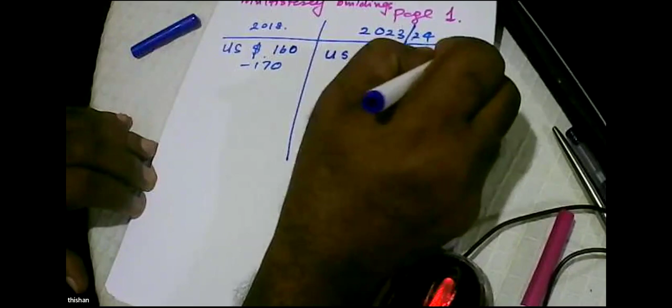In 2018, what was the price of the US dollar? It used to be something like 165, 160 to 170 rupees, just a rough range. Now, taking 23, 24 values, the US dollar has gone up to 310 to 320. But still you can see it's nearly double in rupee terms.

Then we can also look at the price of diesel. It used to be around 120, 130 rupees per liter. Now it is 300 to 350 rupees per liter, and it varies all the time.

And then let's look at electricity. We used to have a unit cost maybe about 10 to 15 rupees. Today it's about 50 to 90 rupees per unit. So you can see very significant variations in costs.

And with that, what could happen? Let's see. So if you look at the basic ingredients that we use: cement, sand, aggregates, concrete, and many other materials, and steel.

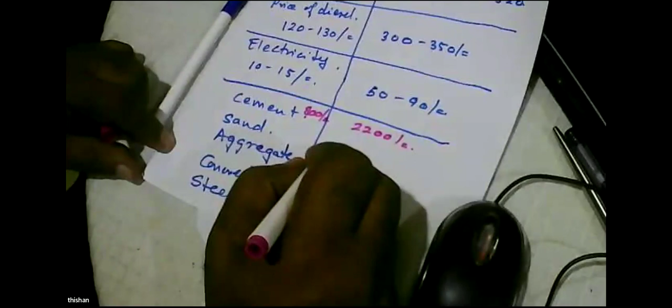Cement used to be around 800 rupees. Now today it's around 2,200. If you look at sand, good quality river sand today costs about 22,000 rupees per cube. Manufactured sand can be slightly lower, it used to be around 10,000. Aggregate cost would have been about 8,000, today it goes around 12,000.

For 1 meter cube of concrete, today, with placing, labor, everything, it can cost between 40,000 to 50,000.

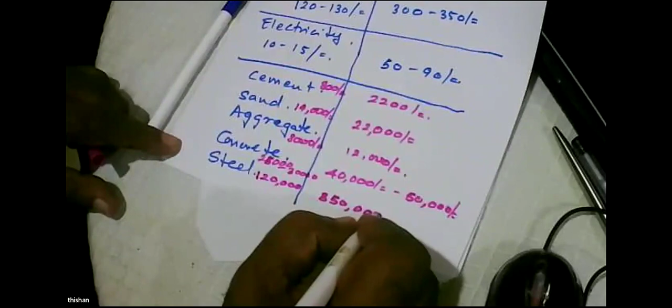Now let's look at steel. Per ton price used to be about 120,000. Today, with VAT prices, it's something close to 350,000. But that is what we buy. If you consider with the fixing charges, this used to be around 200,000. So today it is close to 450,000, 500,000 after allowing for wastage.

Now, if you look at all these figures, for steel we can see clearly about 250% increase, and cement, these prices would have been 150% increase. So you can clearly see where our future should be. Our future should be structures that need less steel.

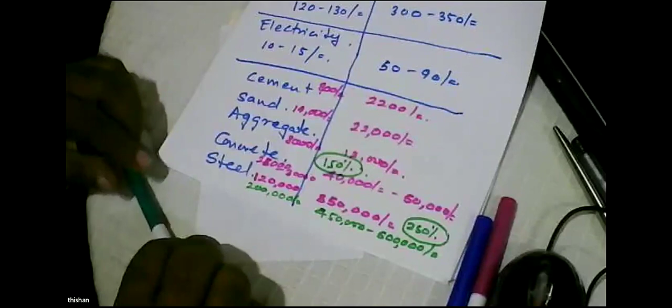So now we have to see whether Eurocode allows, on what basis that we go for this particular concept. So for that, what I thought was, let's look at a past event.

where the whole world had similar problems, and that is 1945, end of Second World War. Russia was devastated. Germany almost completely destroyed. Europe needed a lot of renovations and rehabilitations. And England needed a lot of new buildings. But huge amounts of resources had been used for the Second World War, so there were shortages.

Steel, cement, and many other ingredients were in shortage.

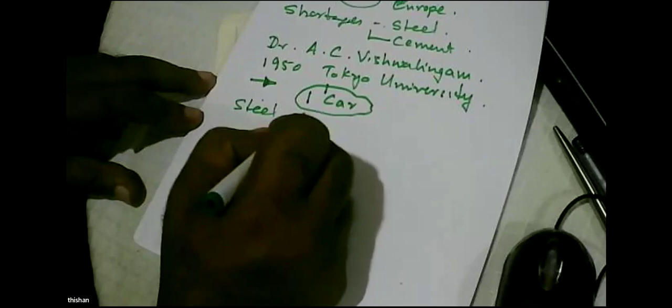Similarly, many other countries faced severe steel shortage. And those days, materials were very expensive, labor was very cheap. People were looking for jobs and they were willing to work for low wages and have simple lives.

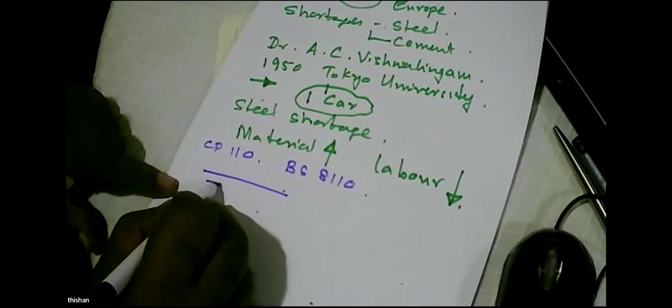So those days, if you look at CP 110, then BS 8110, both codes support something called rib slabs. So the idea is we cast a slab to a thickness of 75 millimeters, and these ribs can be about 2 meters, 2.5 meters apart. The whole idea is this rib will be strong enough to span one way and ensure the deflection delta is pretty low. That's the idea.

Now, if you look at this idea, how does it come? It comes from the behavior of a slab. Let's take an example.

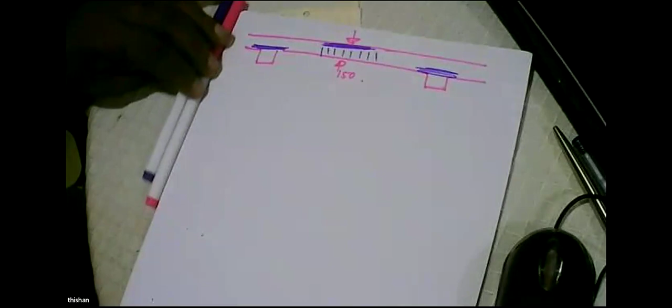Because we know steel has a ferrous oxide layer around it, and there can be various forms, Fe2O3. There are so many different varieties, but let's just say it's an oxide layer. Cement has tricalcium silicate plus water, giving calcium silicate gel plus calcium hydroxide. This creates a lot of calcium hydroxide. So if you look at concrete, its pH value is around 12 to 13.

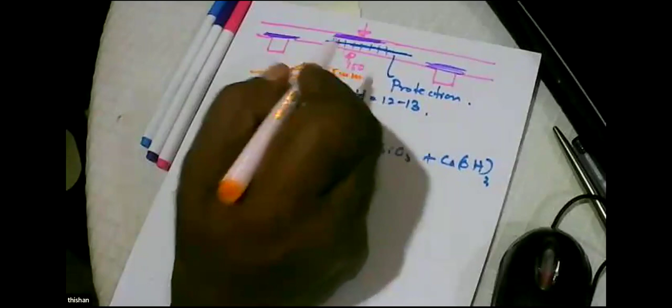And this ferrous oxide layer is very stable when pH is high. So we have a stable environment, and provided that we introduce a cover of 25 millimeters or more, then we can have a structure that is going to definitely last 50 to 100 years, provided that we have cured concrete at least 1 week. Because curing of concrete will continue this reaction, and continued reaction means a lot of calcium hydroxide in concrete, and pH will be high, dense concrete. So curing is very important.

So if we cure concrete, the whole purpose of crack control in cracked concrete is to protect steel. When we say cracked, we are talking about a surface crack width of 0.3 millimeters, but it rapidly diminishes in width, and by the time it reaches the reinforcement, it's negligible. So that's the kind of crack that is allowed, and generally we can't see any of these cracks because they are so fine.

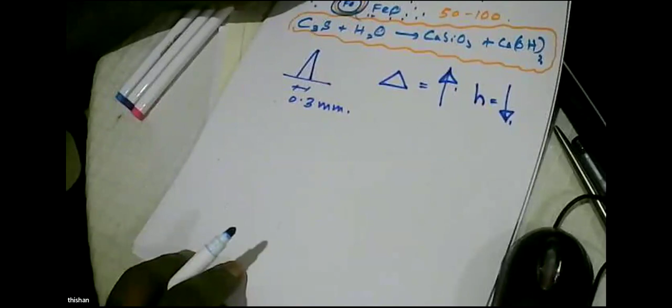So then people thought, why are we having all this concrete? Can't we remove all this concrete? But they found deflection is a big problem. Deflection is high when the thickness is low, so they could not do it. Then they thought, can't we have ribs, beams, and make the slabs as thin as possible?

And when you make the slabs as thin as possible, spanning short distance, with ribs at around 2-meter intervals, what would happen? We can minimize the amount of concrete and steel, at the expense of more shuttering.

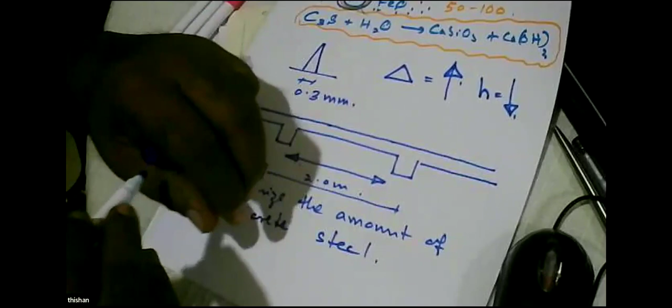Falsework may not vary much because we need less due to lower weight, but we definitely need more shuttering, more labor for shuttering.

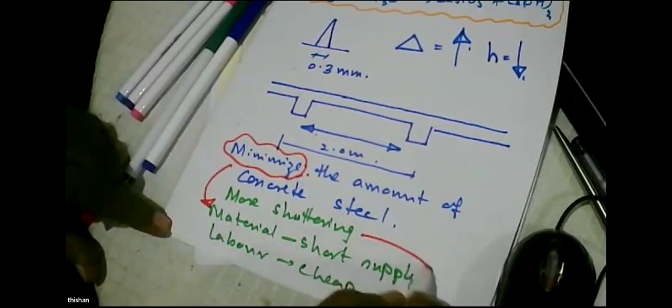So after Second World War, material was in short supply, labor was cheap. So this idea of minimizing material worked well because materials were expensive and in short supply. More shuttering was not a big problem because the saving from material would be much more than the extra work needed for shuttering.

So this was after the Second World War. It needed 2-3 years to recover, and the recovery came in the early 1950s.

And in the early 1950s, there was another special incident relevant to today. China was declared a republic in 1949, and then Americans got involved in a war with China through Korea. It was a very damaging war until 1953. 350,000 Chinese died, 400,000 Americans and Koreans died.

And finally the war ended with a ceasefire. They did not have an agreement, what they had was just a ceasefire - they said, okay, no more fighting. But during this time, China did not have much industry, and this war helped China to emerge and improve their steel production.

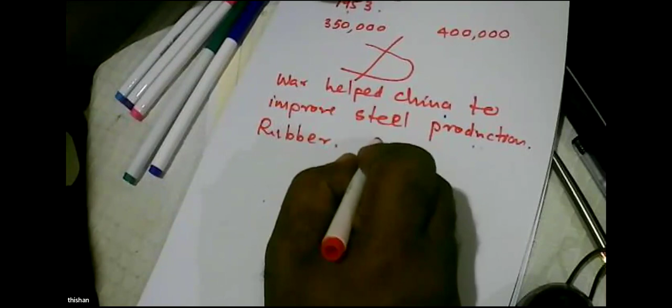War helped China improve their steel production, and they also wanted a lot of rubber. They had a lot of farmers, so they were producing a lot of rice as well. So Sri Lanka started supplying rubber to China, and China supplied rice to Sri Lanka. That is what we celebrated as 70 years of the Rubber-Rice Agreement last year.

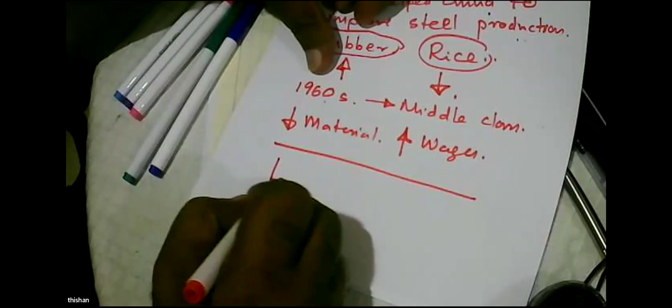Then people thought, why do we need ribs? Let's reduce labor because each rib is expensive. So get rid of ribs, go for solid slabs. They went for solid slabs, and rib slabs lost popularity.

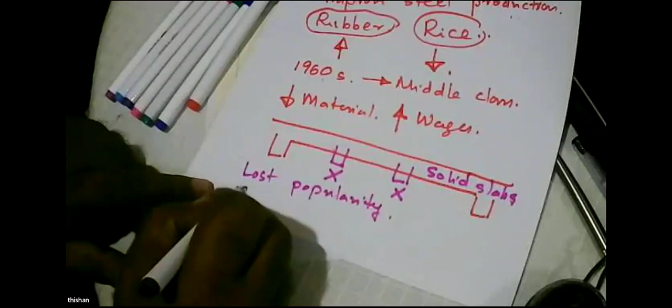Then came the 1970s and 80s. The 1970s saw big trouble in October 1973, when OPEC countries - oil and petroleum exporting countries - decided no oil to USA, no oil to UK, and a lot of restrictions on other countries. And the oil prices increased rapidly.

This led to huge exploration for oil. The economies developed a lot because restrictions forced other countries to explore oil. One of the significant findings was North Sea oil. With that, UK and Norway benefited a lot - these two countries - because the oil prices were high.

In UK, most of this wealth was used for economic reforms in the economy. In Norway, they invested this money.

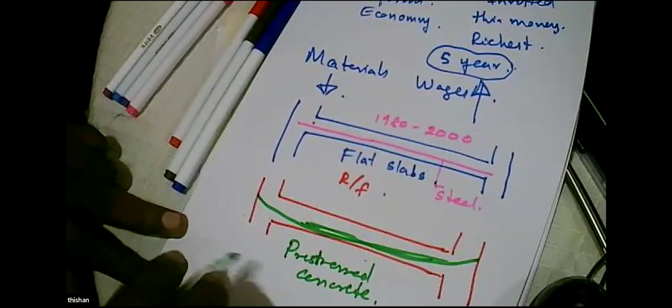Now this was a world trend - in the 1960s, 1980s, 2000 onwards - these are all different trends, starting from ribbed slab to solid to thicker flat slabs. So that's the evolution that took place in the world.

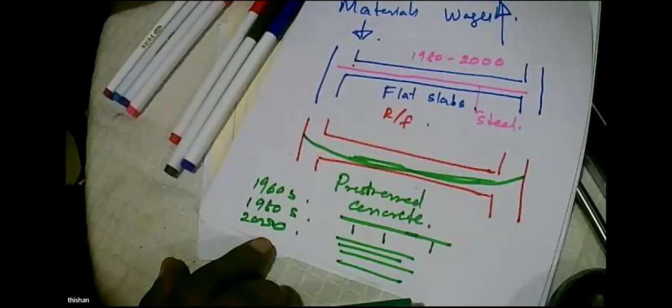Now let's see how Sri Lanka responded. In Sri Lanka, our main exports were tea, rubber, coconuts. In the 1960s and 1970s onwards, we did not have enough dollars, so we had to think of using less steel.

That led to pre-stressed concrete, being actively promoted by Dr. A.N.S. Kulasinghe. So we got PT bridges, bridge beams, and precast technology.

So many things happened in the 1960s - we were well ahead of the rest of the world in technology.

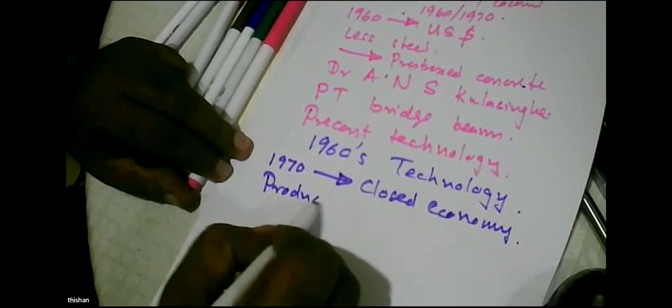However, from 1970 onwards, the closed economy meant many things were produced in Sri Lanka, but not enough - not in sufficient quantities. So our construction lagged a lot, and Dr. Kulasinghe served Malaysia because he found it difficult to work in Sri Lanka.

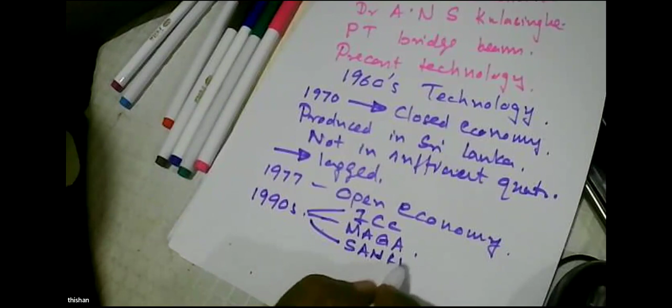Then came 1977 onwards, the open economy. By the 1990s, we started getting big companies like ICC, Maga - they were small companies those days - and Sanken. Our engineers also got more experience, and we also followed the world trends.

So what we did was, we also thought about flat slabs versus solid slabs, solid beam slab systems. We also thought this may be better than that, because that is the world trend. But not only this, we even went to PT slabs.

However, by 2010 onwards, we started hearing construction cost in Sri Lanka is high, and it is much higher than Malaysia.

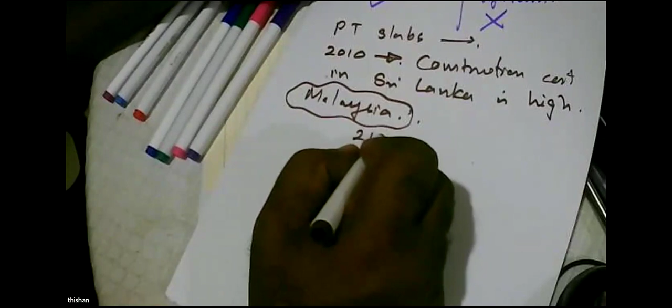But we continued because we had a lot of money coming as foreign remittance, sometimes through diaspora, in many different ways. So we kept on going, until April 2019, where the blast rocked the economy.

And then came COVID. Then came the devaluation of the rupee. And as a result, we had a construction industry down to a very low level. And we had few problems. What are the problems? Too high cost per square meter.

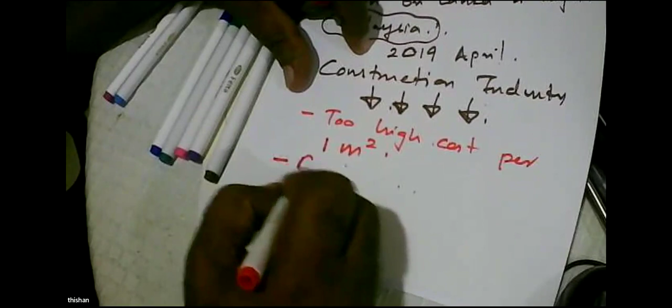And construction is prohibitively expensive. So if construction is not possible, do not buy lands. Why? Because if you can't construct a building, why would you want to buy lands? So this has a rippling effect on all.

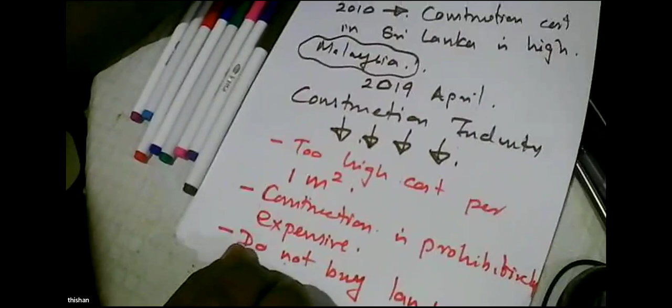So that was the time we thought, now we cannot go on like this. Now we have to make a change. Because we had a lot of research and a lot of alternative materials. But no takers. Nobody is interested in all these new materials that came out as research.

Once in a while we get a client who is keen, and then we might use it, but it was never mainstream. So, if I give some examples of materials, we had Durra, there are straw panels, very good construction material, but only about 15 to 20% of the production capacity was used of the installed factory.

Then we had cement stabilized earth used as blocks, rammed earth. Many people tried to make the blocks popular, but most of them failed. Only a few are now remaining.

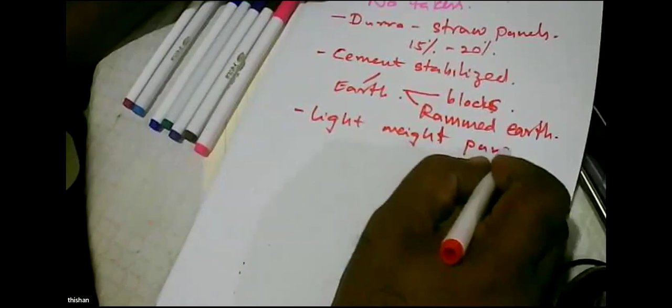Then lightweight panels. So there are so many options, but very few were interested. So that's the time we thought, what is the way out? What is the way out? And the way out is...

Let's see the fundamentals. So if you have a problem, first we have to understand the problem. So we try to look at the fundamentals. The reality of Sri Lanka is still, if you spend 100,000 rupees on materials, we need only 35,000 to 40,000 rupees to convert it to a building.

And if you compare this with Australia and Sri Lanka - in Sri Lanka, one day's labor is 4,500 to 5,000 rupees equivalent. I'm talking about skilled labor. In Australia, the minimum payment for skilled labor is 50 Australian dollars per hour. So the cost can be 400 to 500 dollars because you have to pay for insurance, social security, and so many other charges. So it can be 400 to 500 dollars, which is around rupees 100,000.

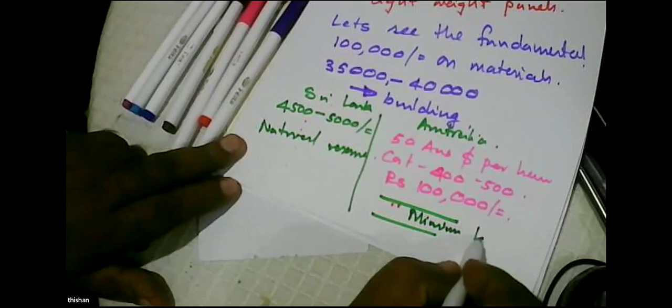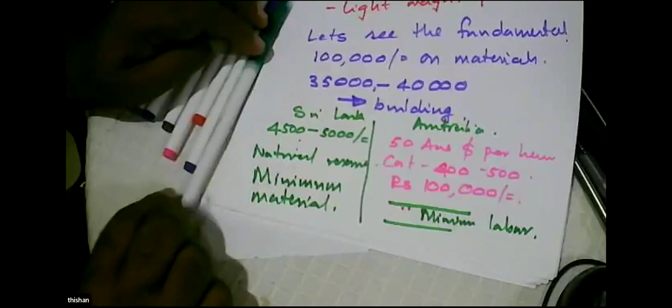Like after the Second World War. So we thought, okay, let's see how this can be realized by making use of the modern research we have already undertaken. We have completed it, the data is available, the technology is available. So let's adopt the technology and see how we can have minimum material and how it can give rise to cost-effective construction. And then you'll ask, why cost-effective? Because if we are to bring the people back to the construction industry, we need to be cost-effective. So we have to see how we achieve it. That's what I'm going to explain in the next few slides.

Bandhuka, is that clear? Yes, sir. Very clear and very interesting, yes sir. Yeah, okay fine, thank you.

So now we have to think not inside the box. So we need to think outside the box. We cannot be thinking inward, we should be thinking outward. So that's what we need. So let's see what is the concept behind this minimizing the material.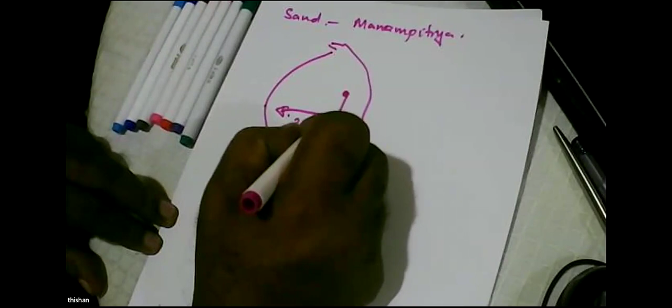Now let's take sand. I will take sand from Manampitiya as an example, which may be applicable for manufactured sand as well. So this is Sri Lanka. It has to come all the way from there to here, maybe 250 kilometers. So diesel at 350, a loaded lorry might do only about 3 kilometers per liter, maximum is 4.

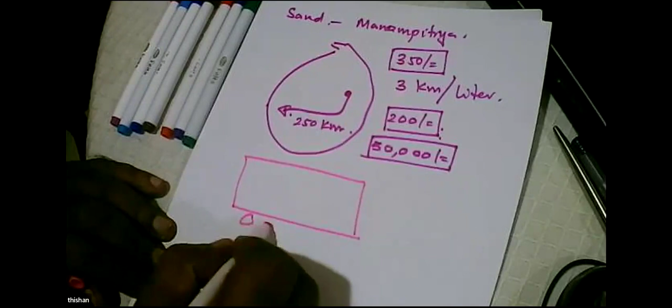Because these are carrying huge loads, maximum is maybe 3. So that means 200 rupees minimum per kilometer. So around 50,000 rupees just for the lorry charges to bring a lorry from there. But you have to think about the lorry going back as well. So what they do is, now they have closed lorries, 10-wheelers. They bring material as sand in the closed lorry, and it goes back with a load of fertilizer.

So from Manampitiya to Colombo, it's a load of sand. And when it's going back from Colombo to Manampitiya, it is carrying all the goods needed for farming. Because of that reason, we can still buy 1 cube of sand for about rupees 22,000.

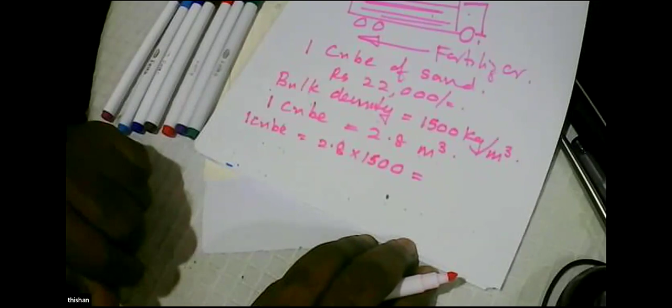Now let's see what is the meaning of this. The bulk density is 1,500 kilograms per meter cube, and 1 cube is 2.8 meter cubes. So the weight of 1 cube is 2.8 into 1,500. Can you find the value? This is the bulk density. 4,200 kilograms.

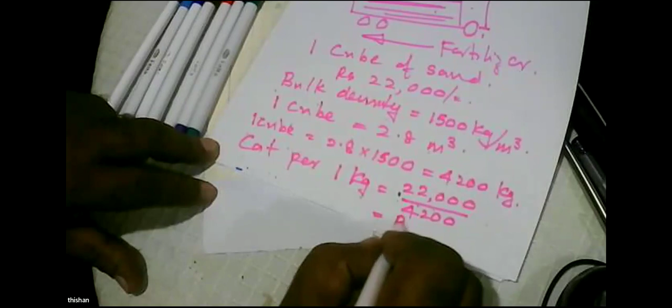So what is the cost per one kilogram? This 22,000 divided by 4,200. What is the value? Comes close to 5 rupees. Yes, 5.23, so let's say 5 rupees, right? Let's assume it's around 5 rupees, can be slightly more.

Now let's look at the cost of cement. Cement is rupees 2,200 per bag, 50 kilos. 2,200 divided by 50, what's the price? 44. Yeah, so let's say rupees 45, because there can be some transport charges as well. So let's say 1 kilogram is 45 rupees.

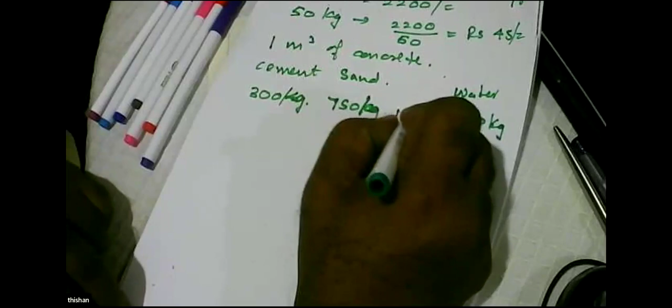Okay, then let's take concrete, 1 meter cube of concrete. We have cement around 300 kilograms, sand around 750 kilograms, water around 200 kilograms. So this should be 1,250 aggregates.

Now aggregate cost will be 12,000 rupees divided by 4,000. It can also be about 4,500 because the bulk density is slightly higher, about 1,600. So what is the price? 12,000 divided by 4,500, earlier we got 4,200 as the weight of 1 cube, so we say 4,500 kilograms. 2.67... shall we say 2.50? Because sometimes you can get aggregates at a slightly lower price. So let's say it's around 2.50.

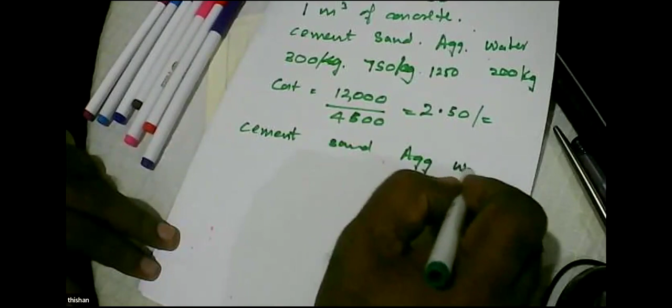Now we can work out the cost of concrete: sand, aggregate, water. I have done this calculation earlier but never showed how I got these numbers, 5 rupees for sand and all that. Can you remember? Yes, sir. We calculated, but I never told you how I got these numbers. Now today we multiply this by 45, multiply this by 5, multiply this by 2.50. And what are the values?

13,500 for cement. 3,750 for sand. 3,125 for aggregates, shall I say 3,200? Then what is the addition? I'll make this 3,800, right? So 13,500 plus 3,800 plus 3,200 is 20,500. Rupees 20,500, right.

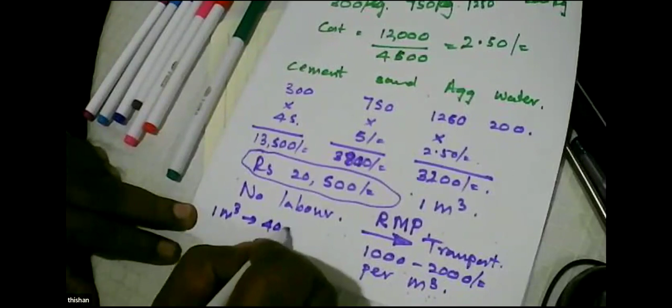That is the cost of materials for 1 meter cube of concrete, without labor. And then if you are making it a ready mix plant, that involves transport, which can be about 1,000 to 2,000 rupees depending on the distance per meter cube. So this is how 1 meter cube of concrete can cost around 40,000 to 45,000. Sometimes it can be as high as 50,000 when we go for higher strengths, but generally we say it's around 40 to 45,000. So can you understand how these figures come?

Yeah, it's clear. Now, if that is the case, we are paying for material, we are paying for the volume. And when we say we pay for the volume, we are actually paying for the weight. So if you are paying for the weight, how to reduce the cost? Reduce the weight. Now how to reduce the weight? Optimize. Now how to optimize?

Now we have to think about what people did after the Second World War. When material was expensive, labor was cheap, so this is what they did: ribbed construction with 75 millimeters of slab and something like 200 millimeters of rib. They went for something like this. This is a small span, so you need a minimum amount of steel, and it can come even as an 8 millimeter bar. You might need a little bit of steel here just to make sure the continuity, and that can also come with 8 millimeter, because these are thin concretes.

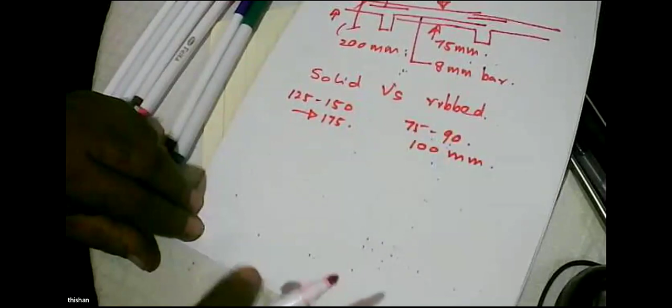So whatever we do, we can have greater control because we are dealing with smaller quantities. When we looked at this possibility, we thought in Sri Lanka we must go one step further. What is the advantage of solid versus ribbed? Solid may be 125 to 150, can go up to 175. Ribbed 75 to 90, and overall thickness is 100 millimeters - when you allow for rib thickness and everything, might not even be 100, but let's say 100. Then we are saving, let's say, 50 millimeters each floor.

50 multiplied by 25 kilonewtons per meter cubed. How much do we save? 0.05. What is the weight, Bandukha? 0.05 multiplied by 25 is 1.25. So each floor we save 1.25 kilonewtons per meter square from a conventional solution.

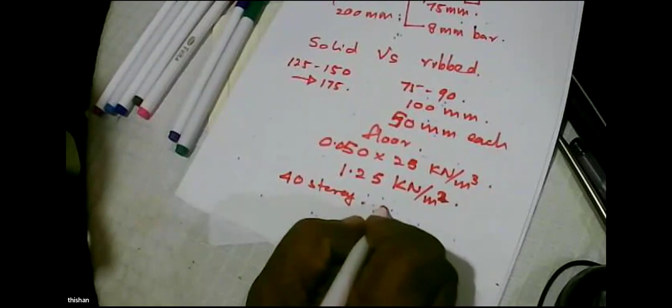And let's say we have a 40-story building. 40 multiplied by 1.25 is saved. How much are we saving? 50 kilonewtons per meter square.

Now can you see that lightweight could have many advantages even in multi-story construction? A slab with minimum thickness can be extremely useful in multi-story construction. But this may have a time factor because we see a lot of formwork involved.

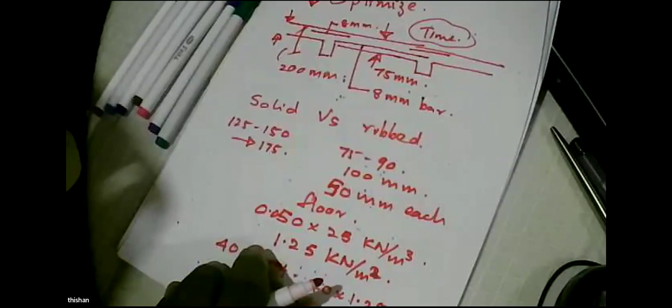So that's where we looked again at some research, completed very successfully, leading to a PhD at Moratuwa University, and that is the lightweight slab systems. This is how the lightweight slab system comes.

We have a precast beam, 175 millimeters thick, 200 millimeters deep, for spans up to 4.5 meters. Then we place these beams at 2-meter intervals. This is a variation from the original designs, where they used 1.5 meter spacing in the original research.

Then what we did was look at how we can improve it according to Eurocodes. So this can be 45 to 55 millimeters. And we have these slabs.

Then we wanted continuity. So let's have a rib like this, with the reinforcement here, and then place a screed.

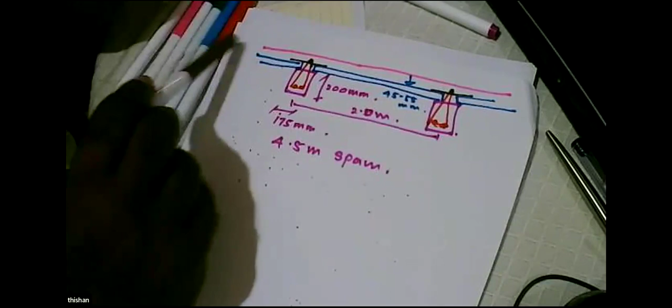And we like continuity, so we provide some top reinforcement here and some top reinforcement here. Then what do you have? Now we have a precast system with a precast slab and in-situ topping. And what is the beauty of the system?

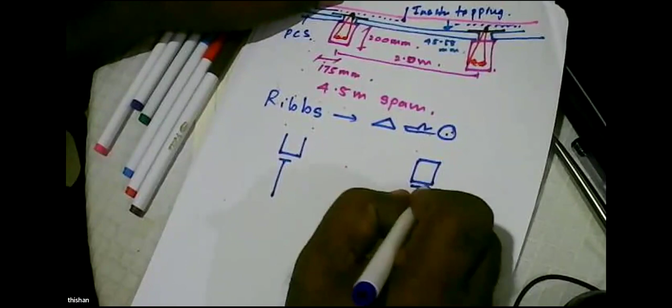Because we have ribs, what is the deflection? Almost equal to zero. Because during construction we can have props for this, and a prop for this. So once you place a prop in the middle, we complete the slab, and then remove the props after the concrete has hardened.

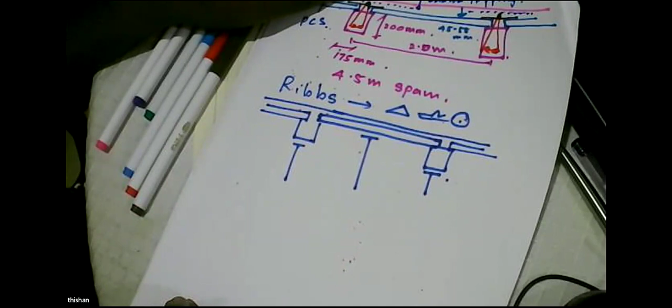These days strength development curves are very rapid, so if we keep this moist and cured with ponding for one week, the concrete will gain huge strength. After one week we can remove the props, and we can precast all these members.

We don't have to worry about the columns and other elements - foundations are cast at a casting yard created on the side of the same site, if space allows. Then we can start casting this. This is the main innovation that we did.

So now I'm going to draw an exaggerated, enlarged view. So this slab, we have this. And because we are placing only 35 to 45 millimeters, only a small quantity of concrete, we can use admixtures to improve workability.

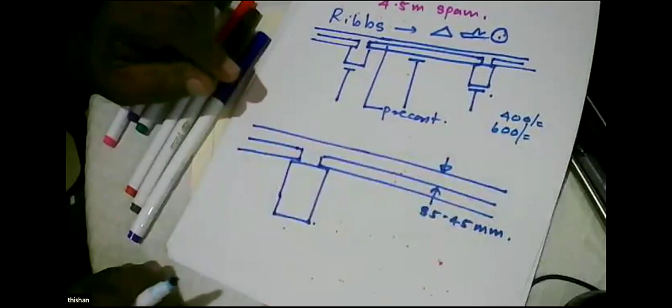One liter of admixture can cost about 400 to 600 rupees. So by using admixtures we can reduce the water content and get high quality concrete, like 30 to 40 megapascal concrete for the screed. Even these can be about 30 to 40 megapascal concrete, because the higher the strength, the lesser the cover required, since we are going for thin construction.

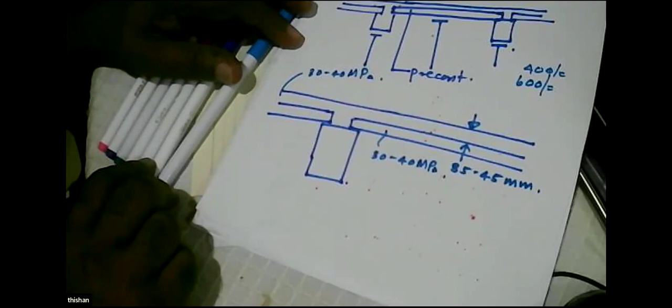If you are going for thin construction, we know in concrete cement is the friend - what is the enemy? So reduce the enemy by using admixtures, so that with the same amount of cement you can get high strengths, like 30 to 40 megapascal. Once you go for 40 or 45 megapascal concrete, the ingredients are the same, but durability is very high, and we can reduce the cover requirements.

Anyway, these slabs are cast like this with a lock, and you need cover blocks and reinforcement - try the other reinforcement. These are all 8mm bars. With Y8 bars, we get about 2,500 meters of steel reinforcement per ton when we buy 8 millimeter bars, so we can minimize the steel.

And these 8 millimeter bars at 150 millimeters spacing, 75 here, 75 here, will be adequate.

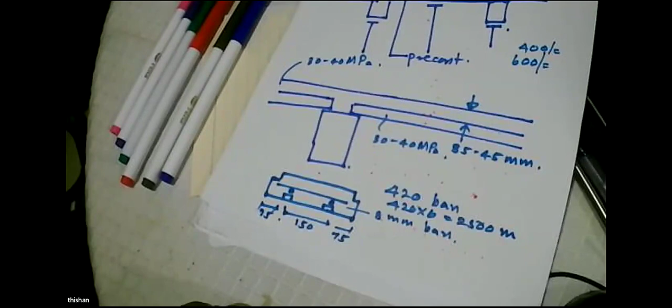On the other hand, we can cast it to 450 millimeter width if a tower crane is available for lifting. So if the tower crane is available, we can cast it at 450 with reinforcement at 150 millimeters, then you need 3 bars like this.

So these are 150, 150, 75, 75, altogether 450. So there are two widths that you can cast. But if you are not having a tower crane, the weight of a panel should be less than 100 kilograms. Then 2 people can handle it. Otherwise, we need 4 people to handle it. So those are the issues that the construction manager should resolve depending on the type of equipment available at the site.

So we complete this for 90 to 100 millimeters. We try our best to reach 90.

Then what we can do is we can get marbles, chips, can be terrazzo chips, or 4 to 6 millimeter chips. What we do is, a lot of grout will be here. We embed these materials and let it harden. By using a float, you can make all these materials firmly embedded. Once hardened, we can cut and polish with a terrazzo machine, and you can get whatever finish you like.

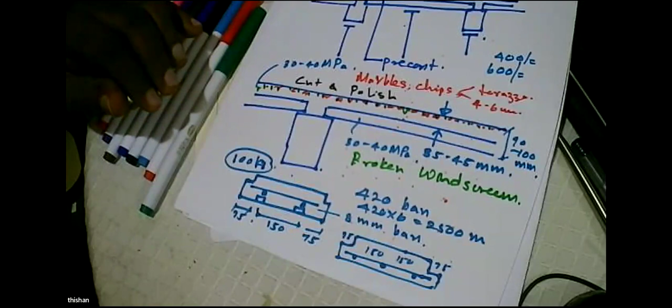Another technique is to get broken windscreens. What you do is you lay broken windscreens, crush it and embed the broken pieces in between. So you can get an extremely nicely finished terrazzo finish without spending money on floor finishes.

That's one alternative. What is the other alternative? We have the same thing. Now I'm not going to draw all the layers, let's assume it is all completed, and we have completed this perfectly level. These are 90 millimeters, these 2 meters.

Then what we do is we mix 1 part tile grout with 1 part fine sand. Generally the tile grout is laid for about 8 to 10 millimeter thickness, but here we lay this mix for a 15 millimeter thickness and lay the tile directly on it, giving a total thickness of around 125 millimeters.

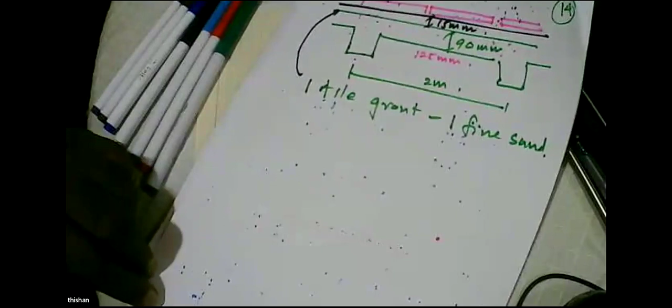Now let's compare this with what we generally do: a 150 slab, because we are concerned about sound insulation. Then we have around 40 millimeter tile bed, then we'll use around at least 10 millimeter grout, and tiles. So what is the overall thickness? Maybe about 200, 150, 200, around 200 to 210.

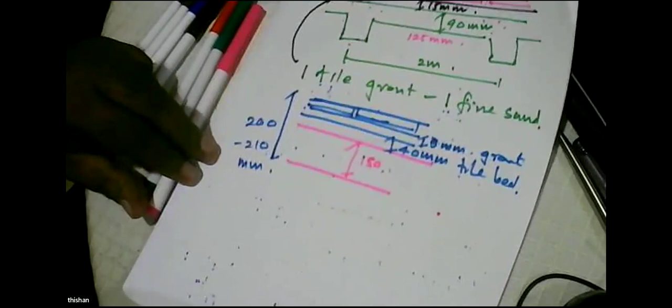So because this is lightweight, let's take a house as a possibility, just to give you an indication of how this can be used in apartment buildings having 7-8 stories.

So just look at a house having a garage like this, and the entrance here, a bedroom here, a washroom here, and these are all the living area, and the staircase here. So here you can get a door, and this may be the entrance. So this is the bedroom, and this may be about 6 meters, this may be another 6 meters. It's a large house.

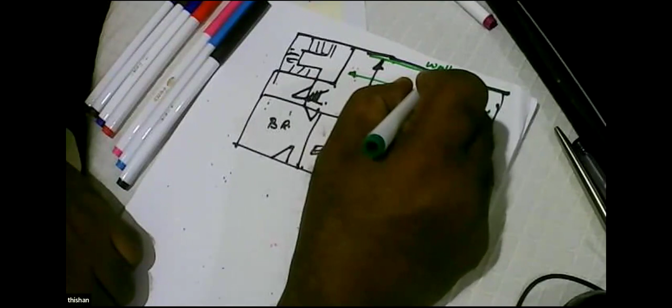So what can we do? Now there may be walls, this may be a wall. So this is a lightweight system, and let's say this is 8 meters. So every 2 meters we have a beam, then we'll place the slabs. So what happens? This is lightweight, so part of the load is transferred there, part of the load is transferred here, and loads are transferred at intervals.

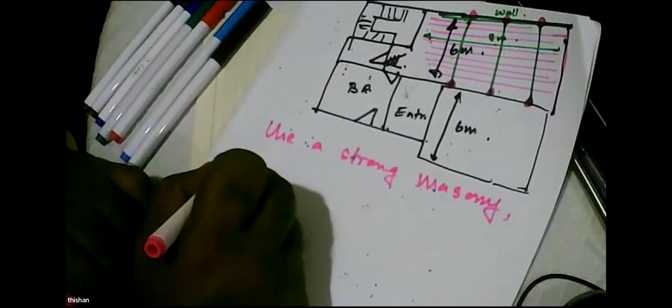And now you can see if we use a strong masonry, it can carry a part of the load. Concrete frame will carry the rest.

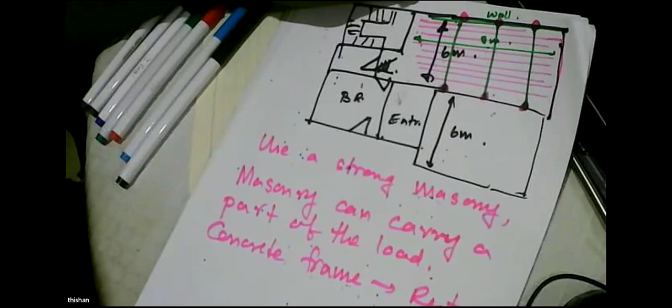So that means, because this system is made by us with precast elements, we can, for example for this bedroom, decide we are going to have the beam this way because this is a wall. This is a wall, the windows are here. We might say okay, I'm going to have the slabs this way. So this wall will carry the weight of the beam because part of this slab will go into this wall, and part of this slab will go into this wall.

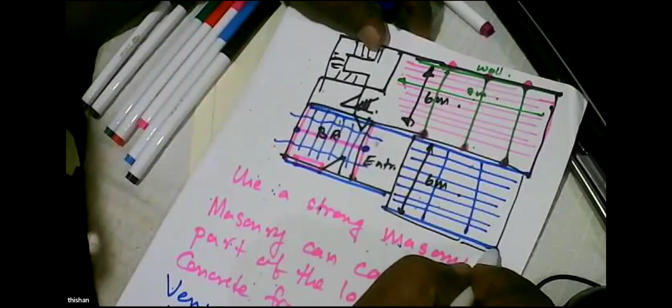So what you see is a very good two-way distribution of loads. If that is the case, you can decide to run the main frame elements only in one direction, and carry all the other elements this way. We are going to have the slabs this way, and we are not going to run a frame this way, because these walls can be load-bearing walls, this can be load-bearing walls. So the moment you start thinking like this, you'll find we have a very good load distribution.

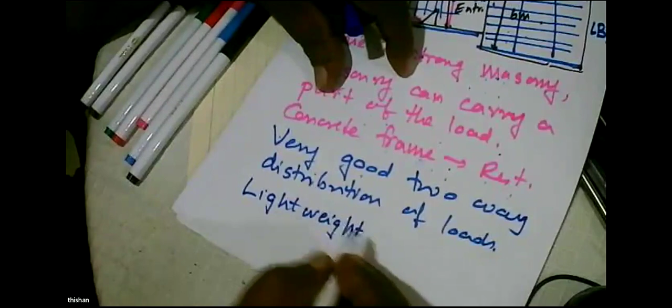So it's lightweight and it's hybrid. Why hybrid? Because loads are going in all directions and we are carrying part of the loads using masonry. And it can be used for multi-story and apartment buildings. What is the beauty of this system? Because the deflections are strictly controlled, we reduce the number of operations. Like what? First thing, no tile bed.

Use high quality bricks, high quality cement blocks. Although we call them cement blocks, they are concrete blocks. Why? Because the reputed manufacturers use chips, manufactured sand, and high quality cement. So it's a concrete block with a very low water cement ratio. These concrete blocks can easily reach 5 to 8 megapascal compressive strength.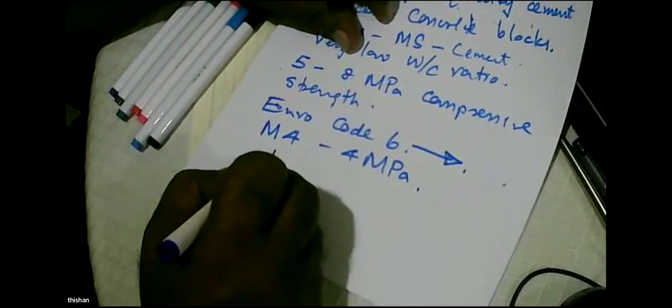And Euro Code 6 tells us with M4 mortar of 4 megapascal, when you know the block strength, M4 mortar is 1:5 mortar, with 5 to 8 megapascal compressive strength blocks, we get 2.5 to 3.5 megapascal wall strength, or you can even go up to something like 4, depending on the strength of the blocks.

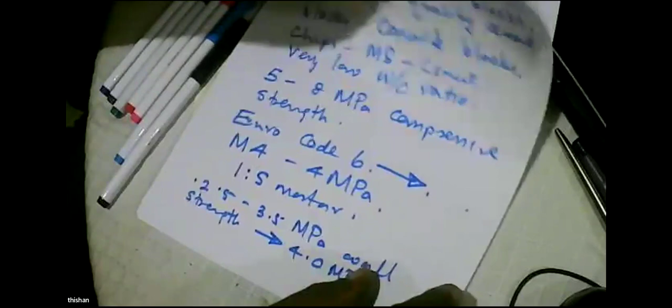And to minimize the weight of the blocks, we don't have to go for solid blocks, we can go for hollow blocks. We can make use of hollow blocks. So what is the concept? The concept is we have less weight in slabs, less weight in walls. Instead of 225 walls, we are using 150 walls. And these blocks are high quality.

So if you construct the walls carefully with due attention, you can make a perfect wall that does not need plaster. And there's a product called Macao Super Plaster, which is a very water resistant product, polymer based. So you can have 3 millimeter, 2 millimeter thin plaster.

And then the door and windows could be out of aluminium or timber. But all the aluminium work is fixed with anchor bolts, so even timber frames can be fitted with anchor bolts. Because earlier, in early days, we made the frames differently, with a portion here to fix, but these days we don't use it. We make the timber frames also like aluminum frames, so that by using anchor bolts, we can fix the system. All those things are available in Sri Lanka.

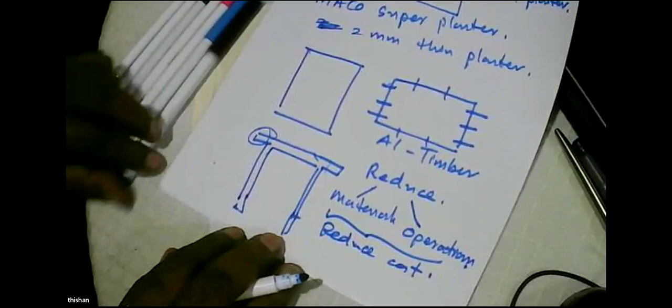So the whole idea is to reduce materials, reduce operations, and in doing so, reduce cost. And you might ask, what is the cost? You can hit 25,000 rupees per square meter for the structure, and you can complete a structure for 50,000 rupees per square meter.

So, what do you think, Madhukar? The concept? It's very interesting, sir, and I think we should take this to the construction industry. Yes, because if we take this to the construction industry, there will be plenty of people who are willing to construct again. And the beauty of this system is it can be used in tall buildings, medium-rise buildings, houses, rooftops, you name it.

So if you are doing a rooftop, why do rooftops leak? We do solid slabs, they sag, and then water stagnates. And with time, due to creep deformations, these sag, and we have problems. But here, we have a slab which does not deflect, lightweight, and very deep. This can be altogether 300 millimeters deep.

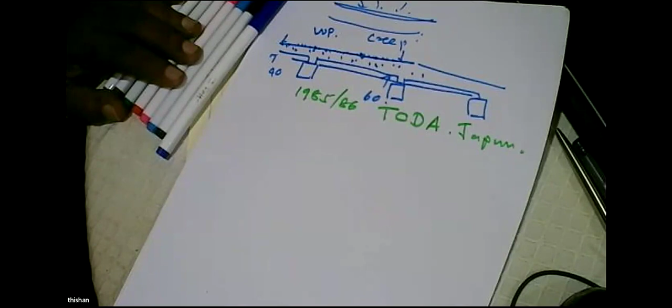And this has been completely developed at Moratuwa University. I developed it fully by using the research done by various other people, published work, and developed this method fully. Today, we have actual examples where these methods have been used for very cost-effective construction. We call it lightweight, hybrid, multi-story construction. This can easily go up to 4-story houses, 8-story apartments, and with little improvement, my gut feeling is we can go up to 12 floors. Just imagine a 12-floor apartment much lighter than a conventional one, needing much less material, having hybrid load carrying systems with minimum plaster, and floors as terrazzo floors or tiles on terrazzo type floors. You can achieve very significant cost savings. And this is our future.

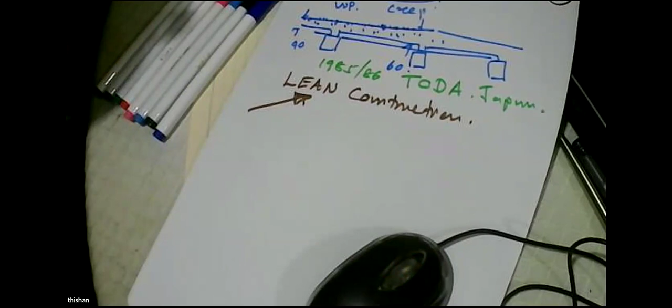So there's a question. Is it possible to provide provisions for services for electricity?

Yeah, actually there are two options. One is, because we are having screed with these panels like this, two panels will be like this. So you can run the conduits here, right? Because the screed is going to come here.

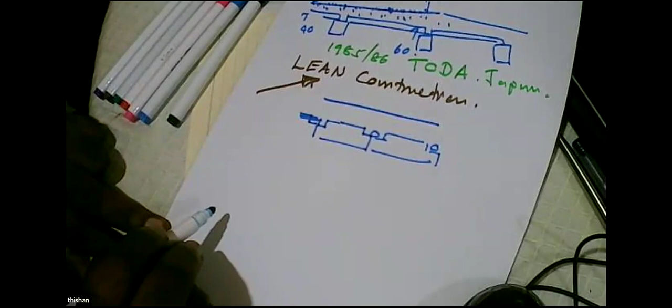Got it? Yes, got it. But the other option is, because we are saving so much money, you can have, by embedding timber pieces here in the beams, or by keeping the conduits here, we can have a suspended ceiling from these beams easily using Eltoro board.

Eltoro boards, these cement fiber boards that are manufactured in Sri Lanka. So we can easily create a ceiling underneath, and all the services can go in any direction, because we are saving so much money in the system.

We can afford to have a ceiling, or otherwise we can easily provide services using conduits, because we can alter the arrangement. One arrangement that was developed earlier was this. These slabs need not be unique, they can be any arrangement like this. So those days we used to run services here.

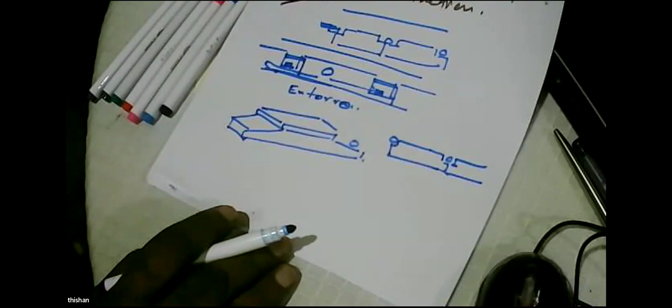Then we thought, okay, that's a little bit of extra work. So let's cast the panels like this, so we can provide the services here. Likewise, providing services is not a problem at all. So that's the first question.

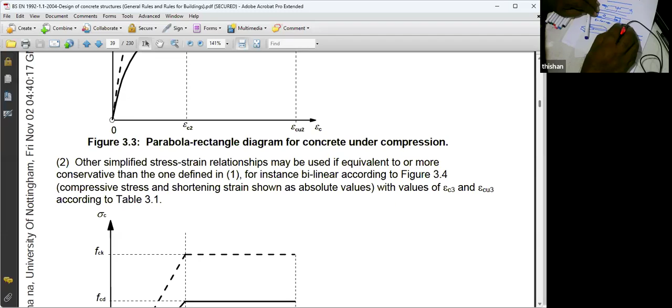So we go for XC3. XC3, members with slab geometry, position of reinforcement not affected by construction process. It says reduce the class by 1. And then it says, if you are going for C35/45 concrete, reduce the class by 1.

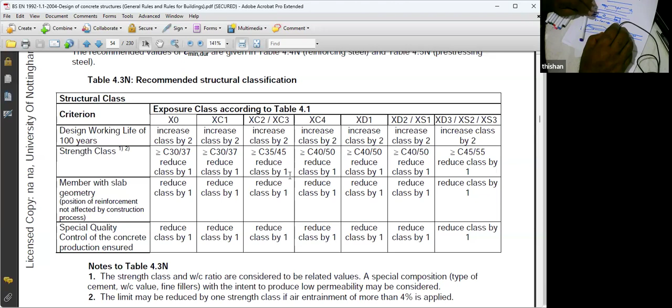So you can reduce the class by 2. So instead of S4, you can try S2. What is the cover requirement? 15 millimeters. Got it? Yeah, got it.

So that's why we use admixtures, because the main advantage is, since we are using very little concrete, we don't have to bring ready mix. We can use site mix, where we use the admixture, minimize the water content, use the vibrator, compact the concrete as much as possible, and minimize the water, because we don't want much workability, since we can use a vibrator and vibrate the concrete in the panel. So anything above 15 millimeters is accepted, because you don't need this delta.

When you look at the cover, there's a delta factor, the 10 millimeter, because we are casting on the ground, we are not working on the reinforcement. So this tolerance is not necessary. What we need is 15 mm.

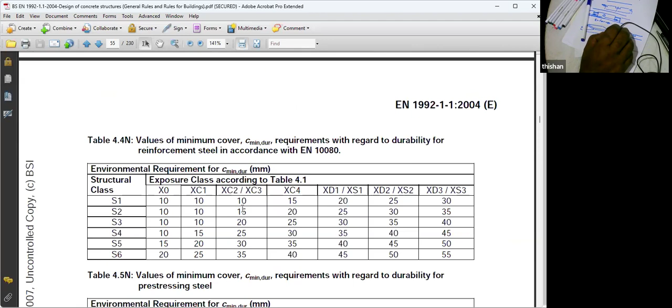What we need is 15 mm cover, because we are using very high strength concrete, where the cover to the reinforcement can be assured, since we are not working on it. We can buy cover blocks, because cover blocks are readily available in the market these days. So we can provide 15 mm, or if you want, you can go for 20 mm.

Okay Madhukar. Okay sir, and so how can we design for Eurocode? We have designed it for Eurocode, so there's no problem of designing it for Eurocodes. Okay sir, yes sir, what else?

How long must the prop be provided until the concrete reaches its strength? So basically, these days we know when you go for high strength concrete, this high strength is, we are going for high strength not for the flexural strength, we are going for high strength for durability.

Even if you design this as a 25 megapascal cube strength, that is enough, because this slab is not going to be loaded immediately after removing the props. You just want a few people walking and attending to the work. As long as you are not going to store material on the slab, the moment the screed concrete cubes reach 25 megapascal, you can remove the props. That is my personal experience.

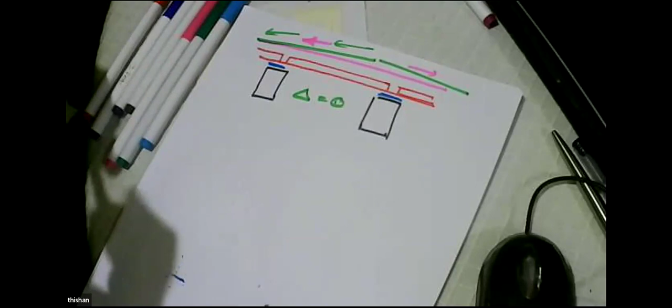But the beauty of this system is deflection is zero, so there's no sagging in the slab. Most of the time you will find that due to creep and shrinkage, slabs sag, and this sag causes water to stagnate. When the water stagnates, all the problems will come and waterproofing issues will result from that. So what we can do is embed chips so that the chips will not wear out - the cement can be washed away, but not the chips. So we create chips here.

And then use the rooftop for planting fruits and vegetables. You keep pots like this, plant them, and there will be shade. These can be specially made so they do not touch the slab. Or you can put a polythene here, or do something else. What happens when you do all these things? The rooftop is readily used, and you might have solar panels covering the rooftop.

You might have an off-grid system, an off-grid DC direct current system, because you don't have to convert it to AC - just use a small DC to AC inverter. Say you want to use an electric kettle, use a small DC to AC inverter and use the kettle. This decentralized system is much cheaper than centralized off-grid solar systems. So you will have two wirings in the house - one for CEB, another for this DC system - and a separate bulb system for the DC system. Whenever you have solar, you can have your own solar system without connecting it to the grid. You can have two systems and save a lot of money on lighting, boiling water, and so on. Even if you have an electric car, you can charge batteries - you can do all those things with DC, you don't have to go for AC, alternating current.

What is the reason? The reason is we are having links like this, other reinforcement, and locks. So this will be a composite action, not due to bond, but due to locking. So we designed this flange, for this beam we designed this to carry the construction. Once you do that, you have hooks and all those connections, so it is all one unit now. So what we do is we design a 90 millimeter slab to span 2 meters according to Eurocode. That's all. And we make it continuous also.

Now, to make the load carrying capacity more, we put some reinforcement here, 8 millimeter bars, very little reinforcement, and make it continuous. So these slabs are now going to behave like continuous slabs. This slab is 90 millimeters. The beam is going to behave as a flange. So this is one system that can be designed for Eurocode. Have I answered the question adequately? Yes, correct sir, it is clear. Okay sir, anything else?